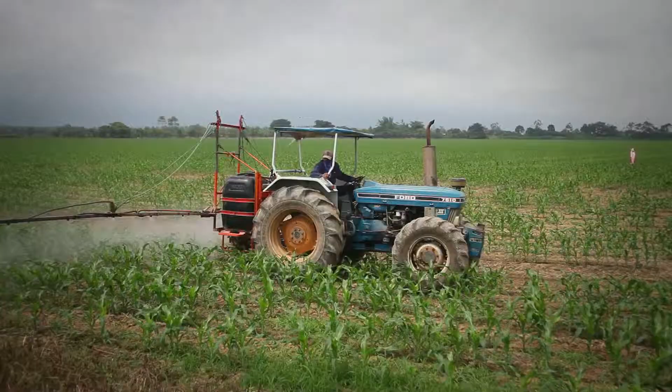Located at the heart of South America, Ecuador has the highest biodiversity on the planet. In this region, nature reaches its highest expression, rich and generous, lavish to the flowering of the most exotic fruits, such as banana, pineapple, mango, cocoa, and its most precious and insinuating fruit, coffee.

A traditional crop and one of the top Ecuadorian export products, with its two varieties, Arabica and Robusta. Ancient traditions passed on through generations have given Ecuadorian farmers the knowledge to harvest the coffee by hand, selectively picking only cherries that have reached full ripeness.

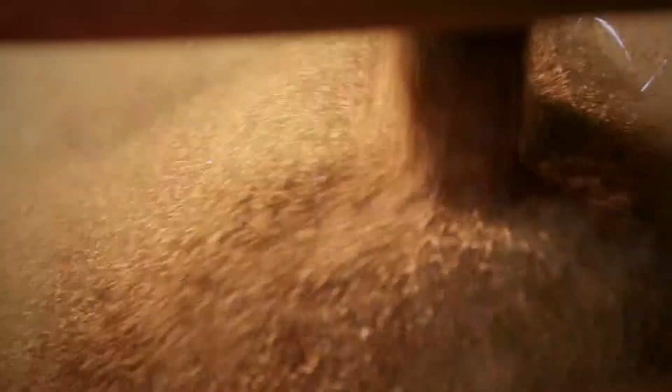Elcafe was founded in Ecuador in 1978 as a soluble coffee producer, focusing in its initial phases on spray-dried and agglomerated coffee in its two production plants located in Guayaquil and Montecristi.

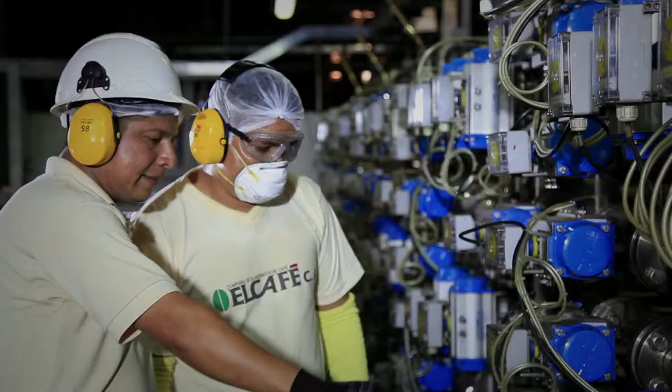The diminished and limited coffee production available throughout the country during the 90s led the company to implement strategic actions in order to sustain commercial and technological growth, add value through freeze-drying to the imported raw material in order to meet and cater to the demand of major soluble coffee customers.

In 1998, Elcafe initiates the production of freeze-dried coffee. The investment in freeze-drying facilities, coupled with professional management of market and price volatility, have enabled Elcafe to achieve stability in its processes and foster growth of both customers and suppliers.

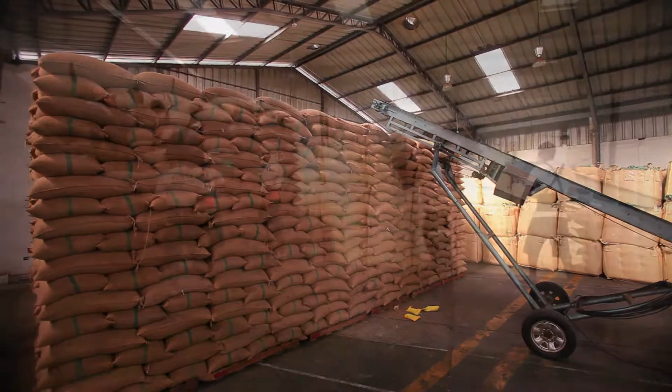Elcafe currently demands 1,250,000 60-kilo bags of coffee to process them into soluble coffee, adding value mainly through freeze-drying technology. This coffee is primarily exported to Russia and the European community.

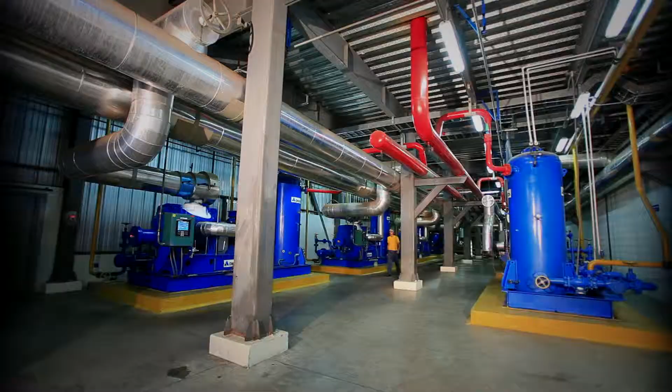Elcafe has developed the best-in-class freeze-dried technology, consolidating its leadership as the largest freeze-dried soluble coffee manufacturer in Latin America. Coffee process.

The process begins with the arrival of the green coffee supply from local farmers and from leading producing countries across the globe.

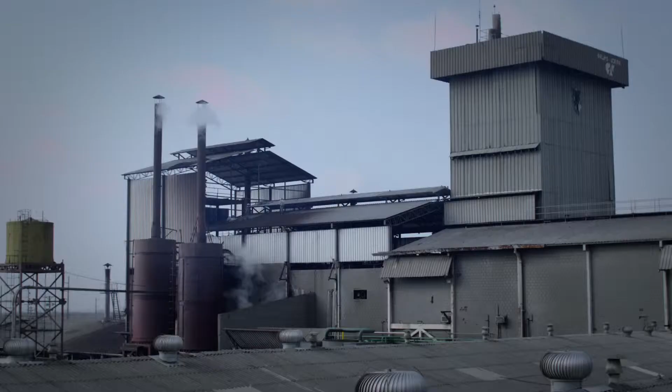Ecuadorian green coffee is directly procured from self-sustainable farmers that are promoted by the company as part of its sustainable agricultural policy applied since 2010.

Elcafe leads self-sustainability projects. These projects are aimed at encouraging the efficient cultivation of domestic farmers through the delivery of technological packages, providing ongoing training, and giving technical assistance and advisory to farmers.

This consolidates efficient production units that ensure the stability of farmers through the cultivation of coffee with traceability of production costs and performance. The goal is to promote, in the medium term, the self-sustainability of at least 12,000 Robusta coffee-growing families.

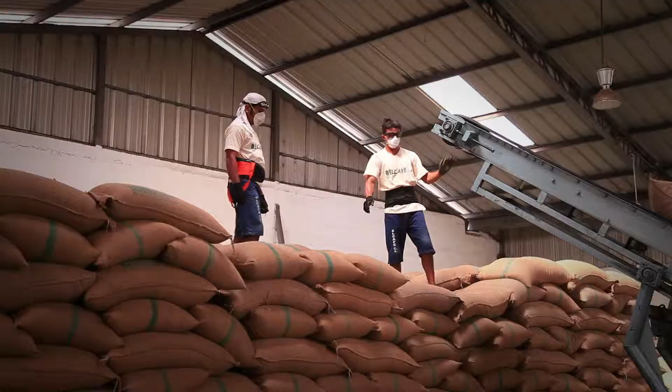Once received, the coffee is stored in on-site warehouses where the quality control team applies strict measures to ensure that each lot of green coffee meets Elcafe's standards and specifications. Standardized and strict physical and organoleptic analyses are part of this process.

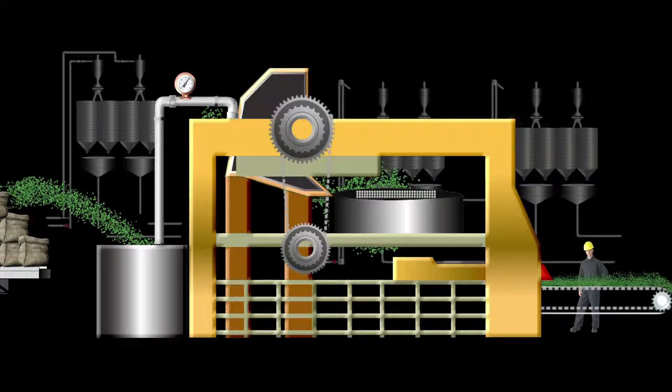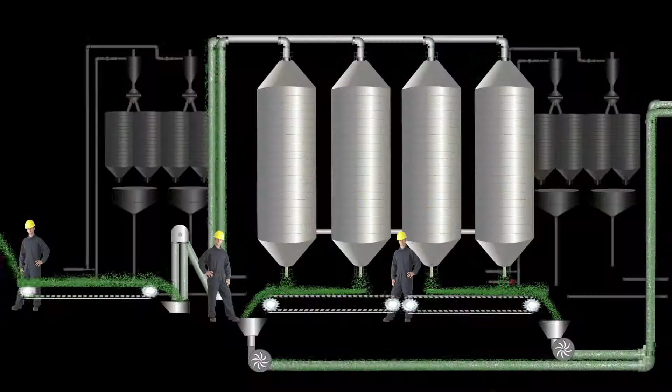Subsequently, the coffee beans are sent to the cleaning machine, where the beans pass through sieves, which remove foreign matter such as dust, stones, and other impurities that are inherent to the harvest process. Once cleaned and the quality approved, the green beans are transported to different silos, which may vary according to the type of bean.

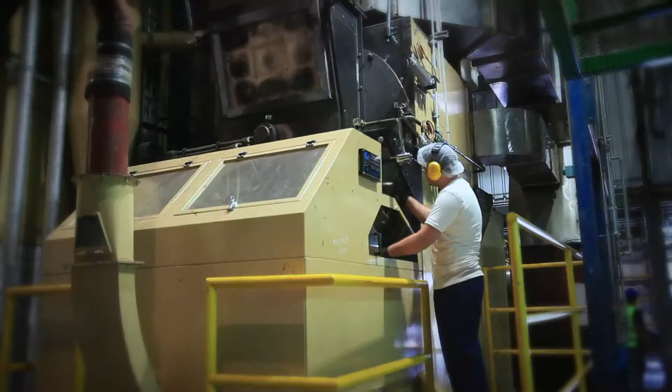Roasting. The beans are exposed to hot air in industrial roasters. The roasting curve varies according to specific blends and customer requirements.

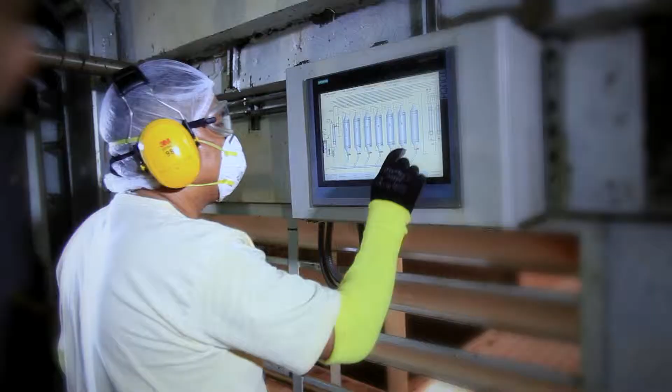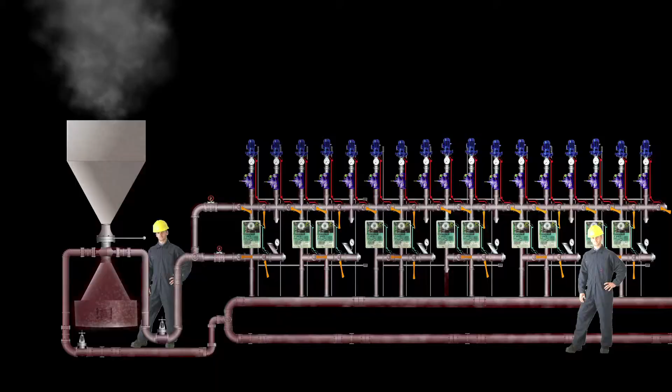Extraction. Thanks to state-of-the-art extraction technology, resources are efficiently and sustainably optimized to ensure less green coffee is used to produce coffee extract. The soluble coffee process demands half the amount of green coffee when compared to what is required to produce one single cup of roast and ground.

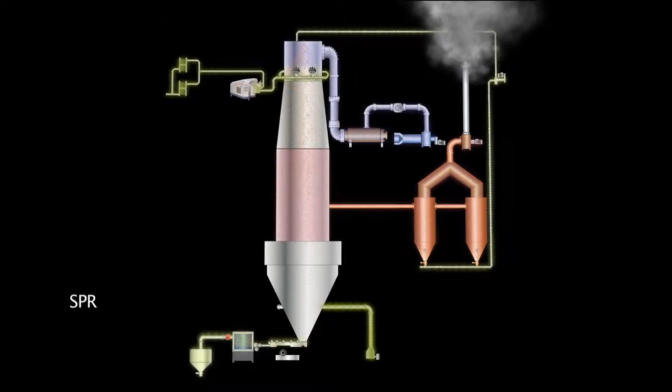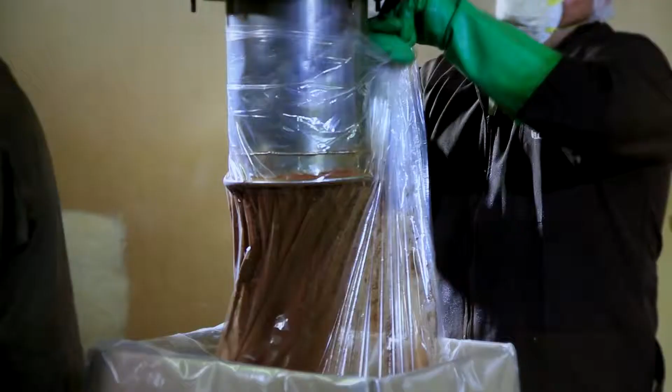Spray-dried. The concentrate is pumped to a drying tower and sprayed with a continuous flow of hot air. This process allows small particles of atomized extract to dry, resulting in fine dried particles, commercially known as spray-dried instant coffee.

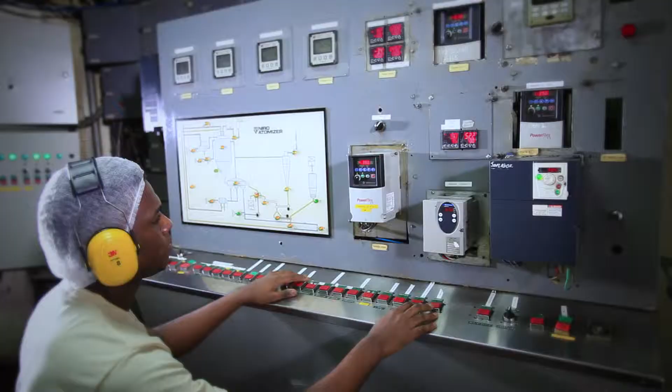Agglomerated coffee. The fine particles obtained in the spray-dried process are exposed to water and steam, giving the final product a coarse appearance, granules, that are known to have a more intense aroma and coffee flavor.

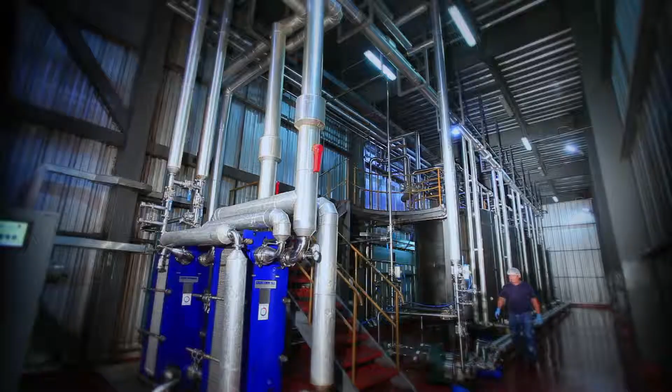The company promotes values of efficiency and competitiveness throughout the entire value chain, essentially adding value in each step of the way. Our core asset is the expertise and know-how in freeze drying.

This process involves freezing the liquid extract at extremely low temperatures, which preserves most of the original aromas and flavors of the coffee extract.

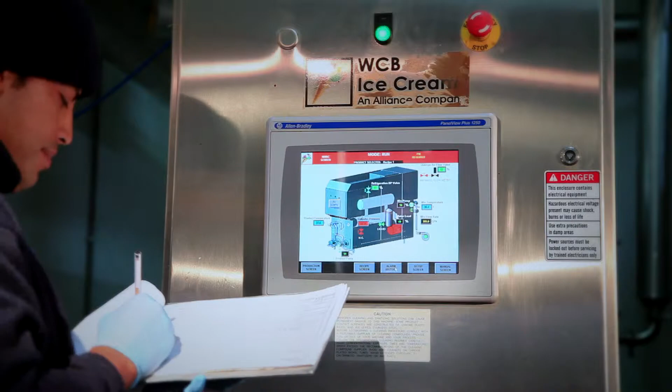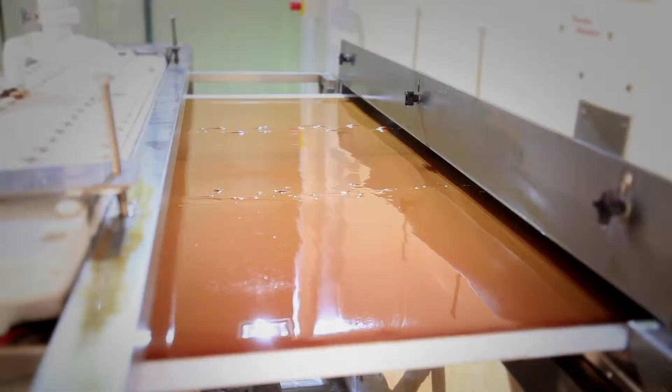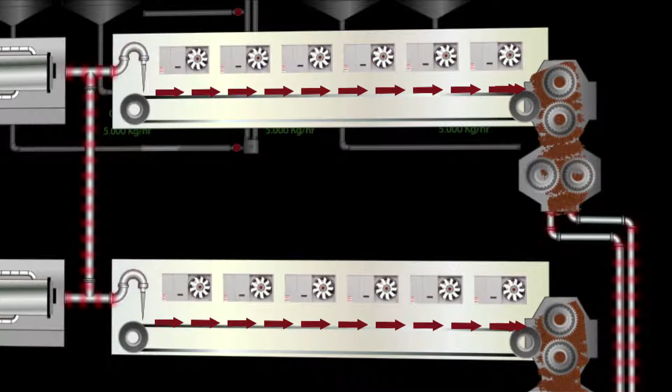The product is then transported through a freezing tunnel, where the temperature is gradually reduced to -50 degrees Celsius. The resulting product has the shape of a crystallized tablet, which is then ground into smaller particles using grinders of various sizes to meet particle size requirements specific to each individual client.

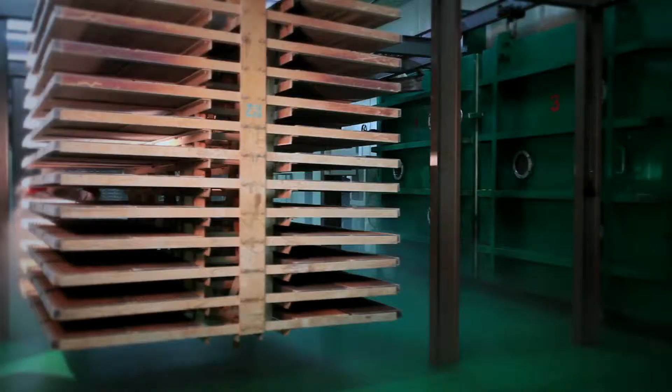Finally, these frozen extract particles are placed on trays that enter the drying chambers. Water is then removed through a process called sublimation, which essentially means it goes from a solid state to a gas without going through the liquid phase.

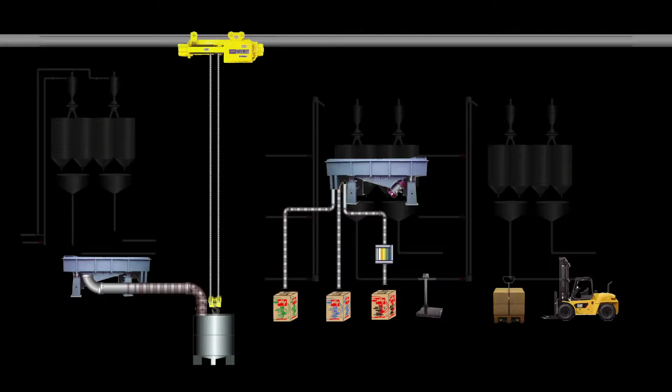This preserves the organoleptic properties of the coffee and thus maximizes the overall quality of the final product. The final product is packed in 25 kilo boxes or 300 kilo big bags depending on specific customer requirements. Elcafe currently has an annual production capacity of 29,000 tons of soluble coffee between its two manufacturing facilities.

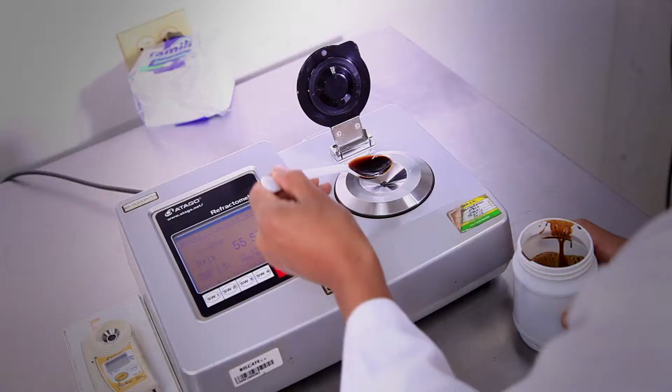Quality control. The Quality Control Department monitors all stages of the manufacturing process in order to ensure a high-quality product that meets international standards required by customers and markets.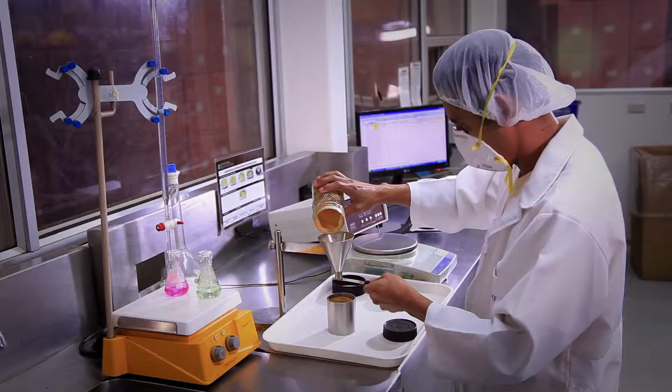Step by step, El Café's staff evaluates all the product's features, such as moisture, density, color, acidity, sedimentation, and above all, the organoleptic profile of the final product that defines and differentiates the intrinsic characteristics of El Café's blends that are recognized worldwide.

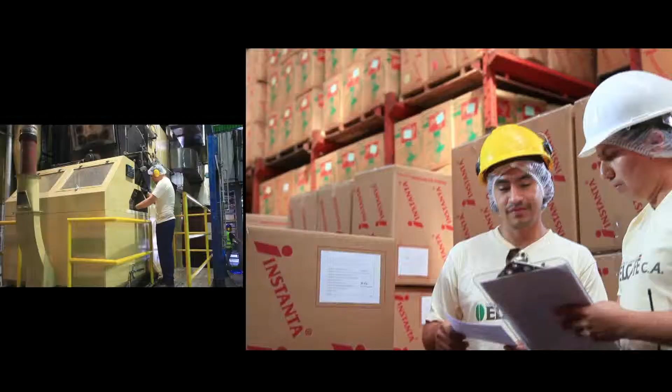El Café has an integrated quality system, such as environmental standards, food safety, occupational health and safety, which are recognized at both regional and international level.

Moreover, the company is ISO 9001-2008 certified, among others, such as halal and kosher.

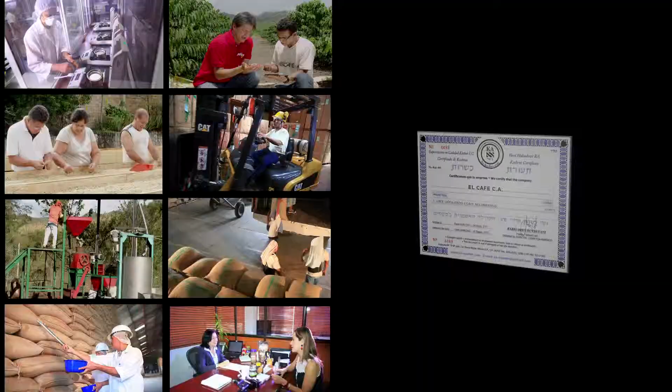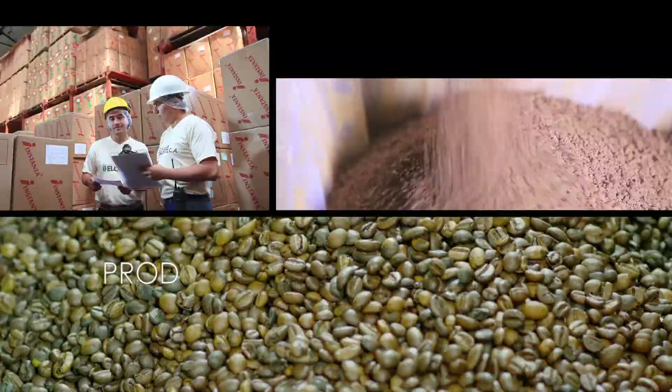El Café currently leads the Ecuadorian market with a 35% share in the soluble coffee category, producing top brands like Presto, Si Café, Expresso, and Montecristi freeze-dried.

The company directly employs 1,250 Ecuadorians in its two factories, as well as approximately 800 indirect jobs through contractors and service providers.

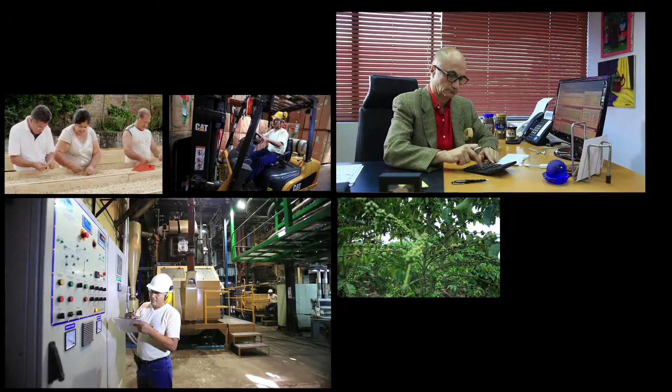El Café has achieved over the past 25 years a strong technological, commercial, and social growth, becoming and consolidating itself as an important contributor to the overall development and growth of Ecuador.